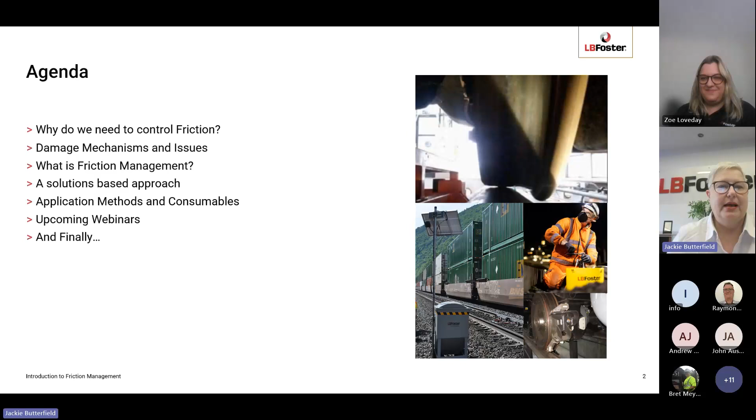So firstly, why do we need to control friction in the first place? Control is very much the correct term to use in this context. Friction is required for movement to occur - without friction there would be no movement. Acceleration and braking would not be possible without a certain level of friction. There's been much debate about what this absolute minimum level is, varying from 0.15 upwards. For the purposes of these webinars, we are basing that minimum level on 0.2.

In the wheel-rail interface, uncontrolled friction can lead to a number of damage mechanisms, shown in the pictures on the right. These include excessive wheel and rail wear, rolling contact fatigue damage, corrugation damage, curve squeal and flanging noise, high lateral forces, potential safety issues including wheel climb derailment and lateral force L/V derailment, higher fuel and energy consumption due to excessive resistive forces, and also at low adhesion levels, the incidence of wheel flats, signals passed at danger, and braking issues.

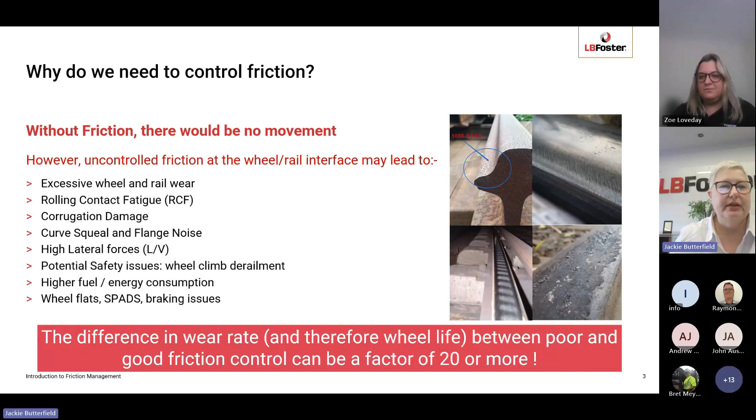It does this by the characteristics of the third body layer accommodating the velocity differences between the wheel and the rail, i.e. the creep and slip in the wheel-rail interface. This third body layer is made up of a number of materials which vary in proportion and composition at any one time - iron oxides, sand, other organic and inorganic particles, water, grease, oils, brake dust, and wear debris. The composition of this layer varies constantly from minute to minute and from meter to meter along the track. So wheel-rail friction depends entirely on the shear properties and composition of this third body layer.

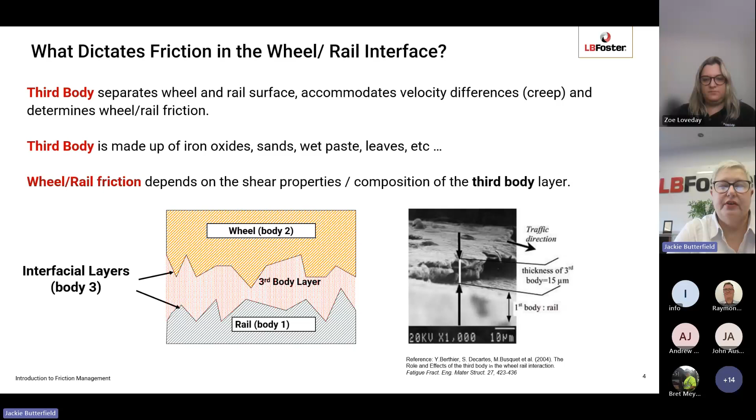Looking in more detail at this third body layer, each component brings its own characteristic level of friction. Working from the top, iron oxides under dry conditions - Fe2O3, the most common iron oxide - will characteristically give a coefficient of friction of between 0.6 and 0.7, a high coefficient of friction. However, if you add water and humidity into that equation, it will drop to below 0.2. So there's a fundamental difference depending on the environmental and climate conditions affecting the third body layer's properties. Other materials such as oil and grease will range anywhere between 0.05 to 0.2, heavy rain 0.2 to 0.3, and inorganic and organic contaminants will also have their own varying levels of friction.

Obviously, organic contaminants such as leaf layers will give a very low coefficient of friction, whereas sand, clay, ballast debris will give typically a higher coefficient of friction. So this mixing pot of the third body layer is changing all the time.

The best way to illustrate this is the classical bathtub model. You have a bathtub which represents the third body layer, and into that you have an intermittent on-off stream of traffic levels, environmental conditions, brake debris, wear particles, sand, friction modifier materials, which are mixed together in the bathtub under the influence of heat. Chemical reactions take place, and out of the drain holes come various chemical reaction products, solid particles, liquids. So this third body layer is changing all the time, and therefore the railhead coefficient of friction is also dynamic and changing all the time.

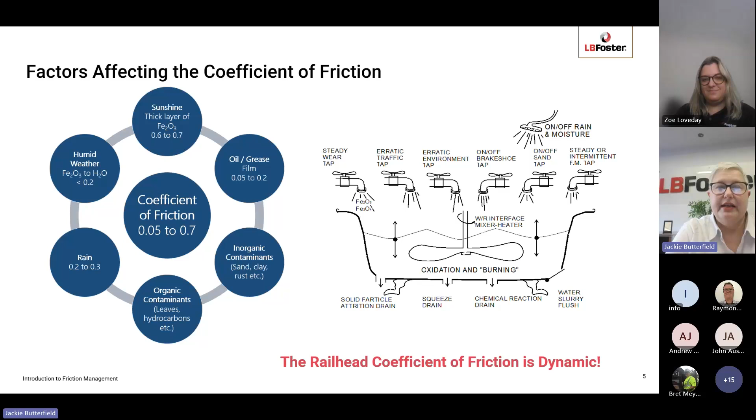In terms of the definition of friction management, our established and agreed definition is the deliberate introduction of materials into the third body layer between the wheel and rail to influence the frictional behaviour. So we're adding products in there to control that level of friction, to mitigate those damage mechanisms, and to give us the desired outcome that we want.

Looking at the range of friction levels that we typically get, with a dry rail condition, we're looking at upwards of 0.5, up as high as 0.7, 0.8, depending on the environmental conditions. For example, in the Middle East, friction levels can be as high as 0.8, even up to 0.9.

We have different target levels of friction that we want to achieve on the railhead and the wheel tread. On the rail head, we want to maintain an intermediate level of friction somewhere between 0.3 and 0.4, to ensure there is no impact on traction and braking. As I said earlier, the minimum level required for traction, adhesion and braking is around 0.2. So we want to achieve a level on top of the rail somewhere between 0.3 and 0.4 to ensure operational efficiency is not affected.

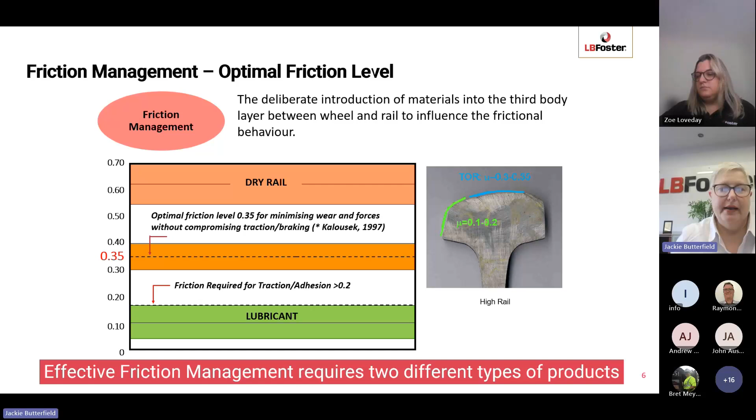We have our materials that we use for gauge face, wheel flange and back of flange lubrication. These are applied and will have the impact of reducing rail and wheel wear on the gauge face, the wheel flange, and any check rail or guardrail in place. They will mitigate against rolling contact fatigue development, particularly gauge corner cracking for the gauge face. They will also mitigate against flanging noise and wheel climb derailment risk, and help with fuel efficiency by reducing the resistive forces in curving.

Applying materials to the top of the rail or to the wheel tread will also have an impact, on top of rail and wheel tread wear. Again, rolling contact fatigue development, head checks, corrugation damage, top of rail squeal noise in curves, lateral forces. They will also have an indirect effect on flanging noise. As you're lowering the coefficient of friction, you're also lowering the lateral forces, so therefore you're improving the steering of the vehicle and reducing the amount of flanging contact.

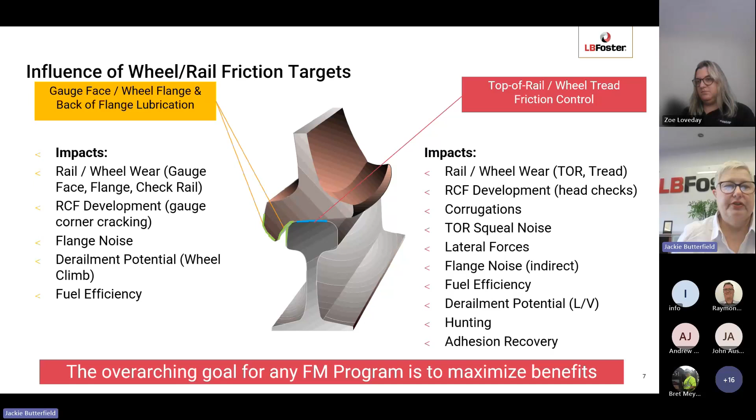So the overarching goal for any effective friction management is to maximize the benefits that you get from the friction management regime. We're looking very much at a solutions-based approach to friction management. To be truly effective, it needs to take into consideration the following: firstly, the technical details of the system.

So what are the issues that we're facing? Are these issues localized on a particular section of track, or are they widespread? How severe are they? How accessible is the track or the vehicles in terms of maintenance and installation? And how practical is a friction management solution?

Look into the system details, the age of the system, also the organizational characteristic. Who owns the system? Is it separate ownership of the track and the vehicles as it is in the UK, or is it under one ownership? Is it an open or a closed system? Is the track shared by other types of vehicles or one single type of vehicle?

What of those vehicles? What are their characteristics? What is their configuration? What is their wheel profile, their wheel rail dynamics? And also to look at the track - what is the track characteristics, the length, the number of curves, the severity of a curve, and also the environment.

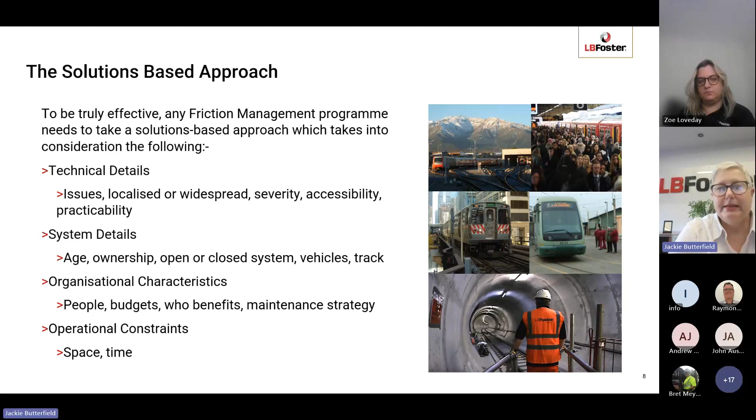Are there any operational constraints? Other constraints in terms of space for location of units, or are the constraints in terms of time? Is it a 24/7 operation? Does that give you limited time for maintenance and for installation of equipment? So all of these factors should be taken into consideration when designing a friction management solution.

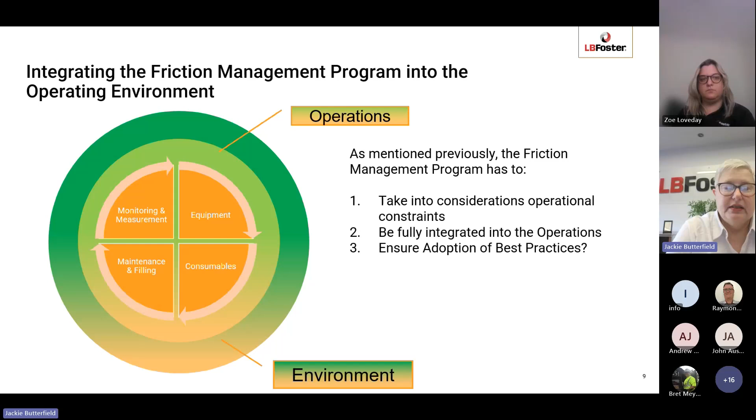And the friction management solution needs to be integrated completely into the rail operation environment. So it has to take into consideration any operational constraints, the operational regime, and also needs to adopt the best practices for friction management. But it's not just looking at the equipment that is used and the consumables. It also includes the maintenance regime and the filling frequency, and probably of most importance, a monitoring and measurement regime to enable you to actually measure the benefits that you're getting from the friction management program. Because if you can't measure and validate the benefit, then what is the point in employing the friction management in the first place?

So moving now on to the hardware. In terms of the two areas, we have a number of options for applying friction management products. So for the gauge face, we have a trackside option - trackside hardware that apply product to the rail. We have the option of onboard solid sticks, which apply product to the wheels. And we have onboard spray systems, which apply liquid products to the wheel flange. Also for the top of rail, we have trackside solutions as well, onboard solid sticks and onboard spray systems.

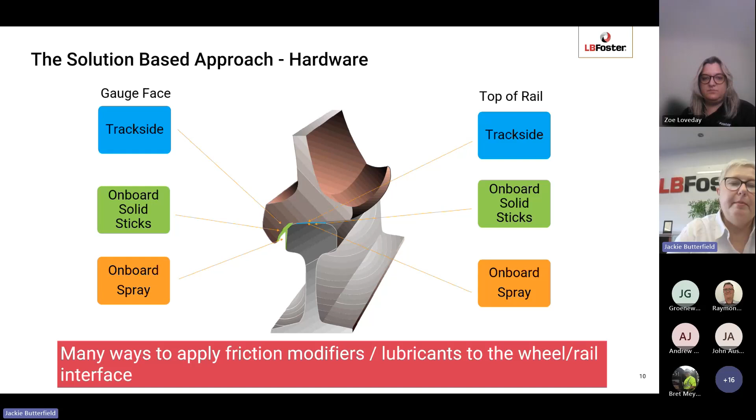So really we're looking at the right solution for the customer in terms of looking at localized issues as opposed to widespread issues, and that would drive you down either a trackside or an onboard solution. And then we're getting into the details of the consumables that you want to use in the system. Are they solid sticks or are they liquid products? So there are many, many ways to apply friction modifiers and lubricants into the wheel rail interface.

So looking now at those consumables, for trackside, for the gauge face or wheel flange, you're applying greases. For onboard solid sticks, you're applying flange lubricating sticks, or also the option is if you have a grooved rail or a check rail guardrail system, you can apply stick to the back of flange to combat back of flange wheel wear and noise as well.

And in terms of the onboard spray, you have a number of commercially available onboard oil spray systems, which will spray a fine spray of oil onto the wheel flange. At the top of rail and wheel tread, again, we have trackside options, which can apply friction modifiers or traction gels for adhesion enhancement to the top of the rail. For onboard solid sticks, we have tread sticks, which provide an intermediate coefficient of friction rather than a lubricating level of friction below 0.15. And then finally, we have the onboard spray systems, which can apply friction modifiers from the vehicle directly to the top of the rail.

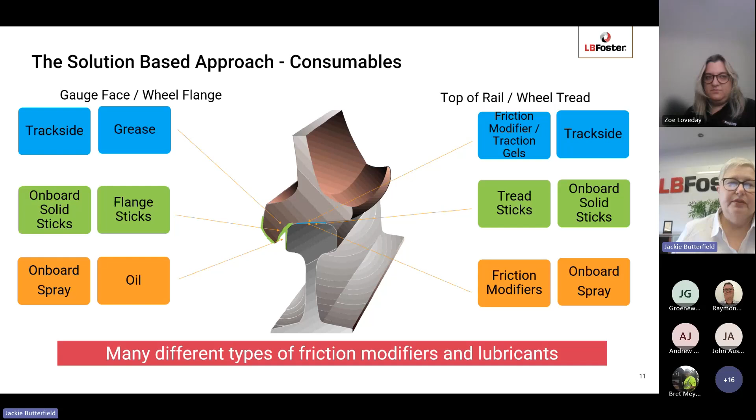So again, with the different types of hardware, we have many different types of friction modifiers and lubricants available on the market.

So now just going into a little bit more detail in terms of the hardware. So in terms of trackside friction management application, this is going back to the very, very simple systems. So these are the legacy systems, the mechanical lubricators. So these are only for gauge face lubrication.

So these are very simple mechanical devices which are actuated by a plunger, which is applied to the field side of the rail. The wheel presses the plunger, opens a valve, and then that allows the passage of grease from the spring-loaded yellow canister out onto the applicator bars and onto the rail.

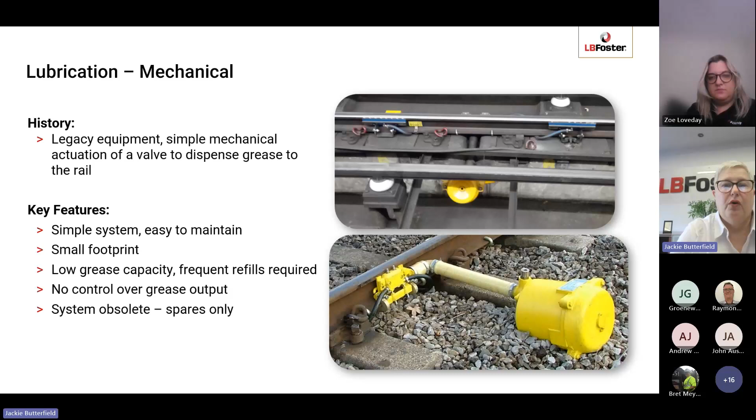So it's a simple system. It's fairly easy to maintain. However, it has a low grease capacity, and so you're looking at frequent refilling of these grease canisters. You also have no or little control over the grease output because every time the wheel passes, the valve is opened and the grease is applied, which may be over-applying the grease and you're wasting product that you don't actually need. However, as far as LB Foster are concerned, this system, the mechanical system, is obsolete, but we do still sell some minor spares for the existing units still out on the network.

In sophistication slightly, we have hydraulic actuated units. These are cost effective, again a very simple system actuated by a hydraulic actuator. A plunger is attached to the field side of the rail. The wheel actuates the plunger, which pressurizes a hydraulic line, which then opens the pump, and grease is applied through the hoses to the bars. Again, it's a simple system which outputs grease every time the plunger is actuated.

There is limited output adjustment, so you may be over applying grease or wasting product. There is a limited output adjustment by a regulator valve on the pump, which can be used to fine tune the output slightly, or you can increase or decrease the height of the plunger to give you a larger or shorter stroke, to give less or more grease.

These units are quite flexible in terms of capacity. They start from a small unit at 12.5 kilos up to a larger one at 37.5 kilos, but you can couple two tanks together to give a 25 or 75 kilo capacity tank. The other advantage is that you can actually embed them in the ballast, so you can bury them to give a very low height profile, fitting them into areas where you've got tight gauging tolerances.

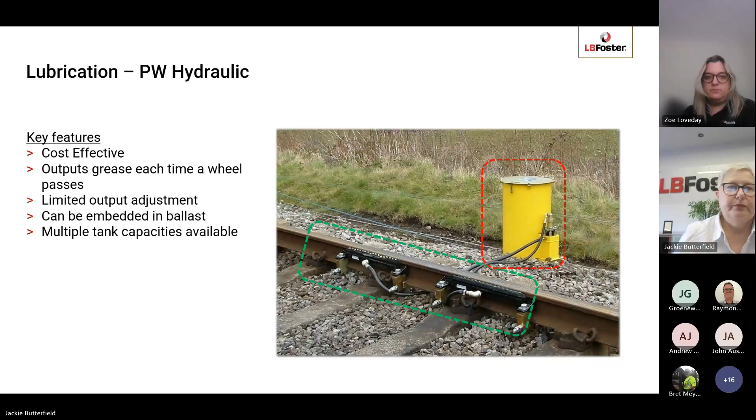So then we move on to the electric units, and we have a number of different types of units here on the screen. These give a much greater control over the output of grease. They feature a product tank and a digital control box, which allows you to set a precise pump time and axle count for each activation and application of grease.

Typically they are solar panel powered with a 12-volt battery, but they can be AC mains powered as well. These are seen as the best approach and the most sophisticated solution for gauge face lubrication, and also for top rail friction modifier trackside. So one electrical lubricator can replace multiple mechanical or hydraulic lubricators due to the increase in efficiency.

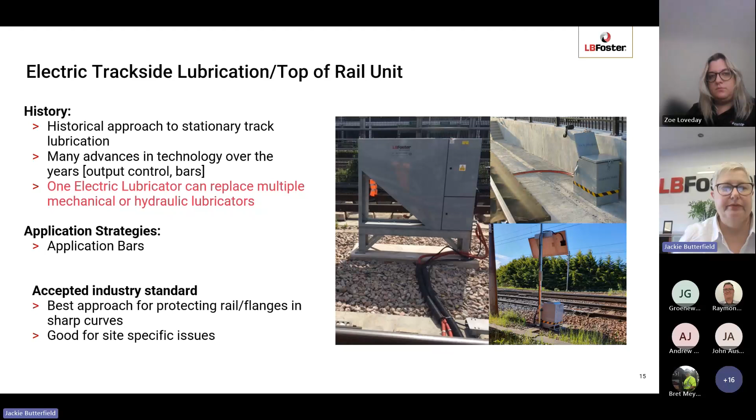To get the grease onto the rail, or the top rail friction modifier onto the rail itself, we have a number of designs of applicator bars. These are clamped to either the gauge face of the rail for gauge face grease, or to the field side for top rail friction modifiers, or to the check rail. The top right picture is a check rail bar applicator. These have multiple distribution ports to distribute the grease effectively.

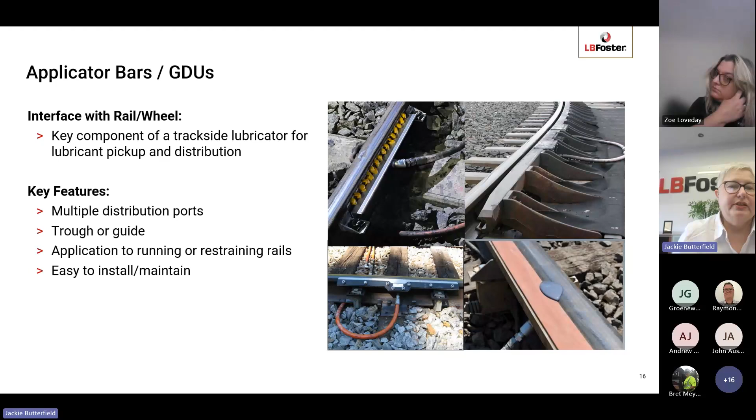They can come with a grease trough or also with a grease guide, which will assist in keeping the grease against the gauge face. They can be applied, as I said, to running or restraining rails, and they're easy to install and maintain.

And then we have the traction gel applicators, which are a slightly different design but work in exactly the same way, with a product tank, a control box and a pump system, and apply traction gel onto the top of the rail.

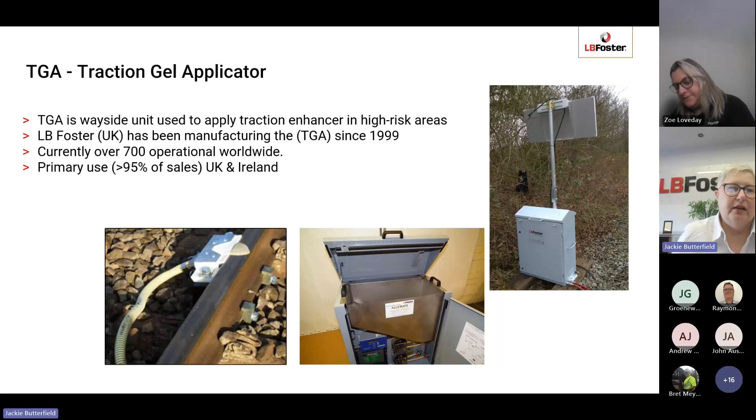Onboard solutions, we have the solid stick solutions. Here we have an example of a triple system: a wheel flange stick applicator, a tread applicator, and a back of flange applicator as well. These are a very simple mechanical system with a constant force spring in the back of the applicator, which holds the sticks against the wheel. No electrical or pneumatic connections are required. The system is self-regulating and is very, very easy to install and maintain.

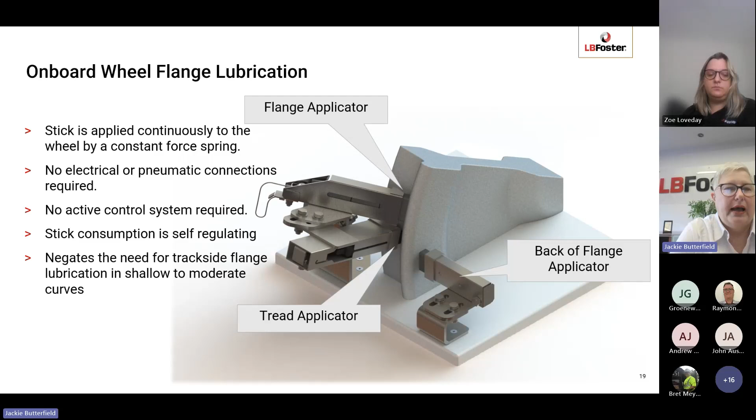The key components of the system are an interface bracket, which connects the applicator to the bogie frame of the vehicle, and the applicator which houses the sticks.

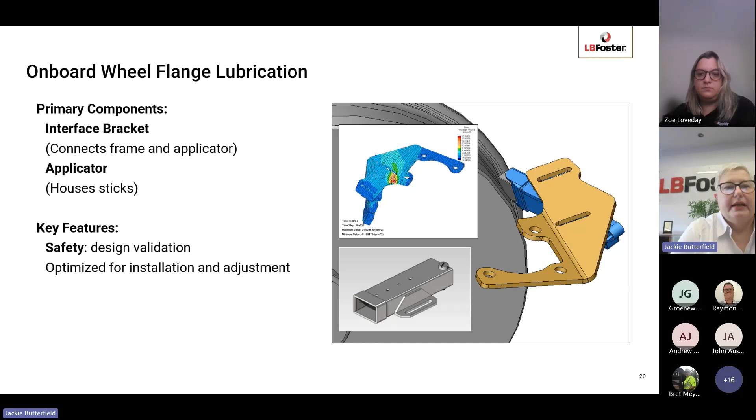And then we have our onboard top rail and wheel flange spray systems. Wheel flange oil spray systems are well established. L.B. Foster doesn't supply these, but there are a number out there on the market. But top rail spray systems are a newer technology and give the same benefits as top rail trackside units. However, the maintenance is carried out in the depot.

So in terms of safety, these are much safer systems, and they can be controlled to spray where and whenever they are required through a sophisticated control system.

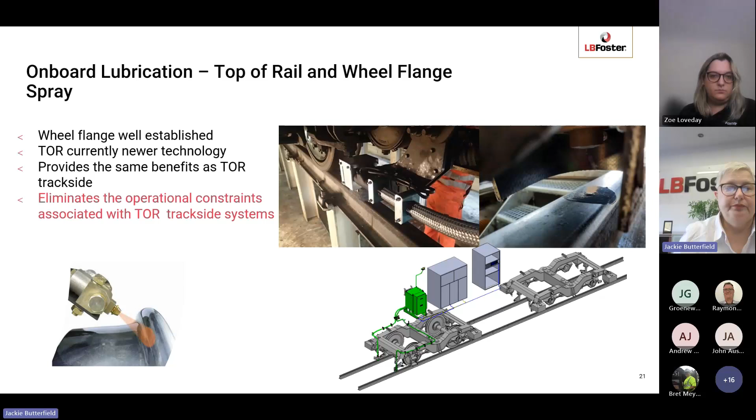The benefits that can be achieved - a couple of tables here on rail wear and wheel wear reduction. We have typical reductions in top of rail wear and gauge face wear for gauge face systems and a combination of gauge face and top of rail friction modifiers. So you can see the range of benefits there, and also on the wheel wear - up to 95% reduction in flange wear and around 50 to 60% in tread wear.

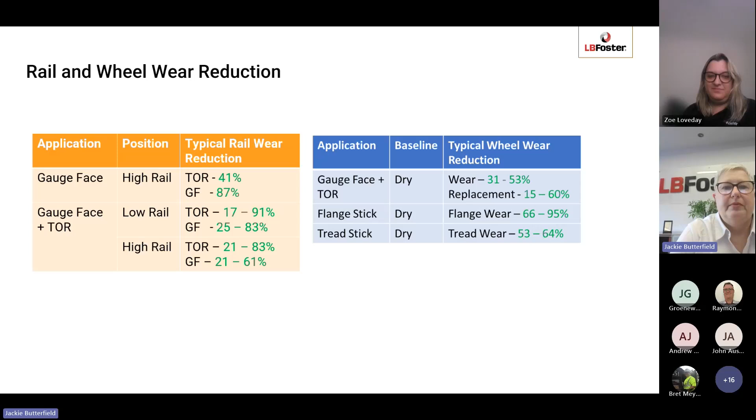So finally, in summary, I've gone through why do we need to control friction in the first place, what are the damage mechanisms and issues, what is the rough definition of friction management, and how do we approach it from a solutions-based approach. A brief walk through the application methods and consumables.

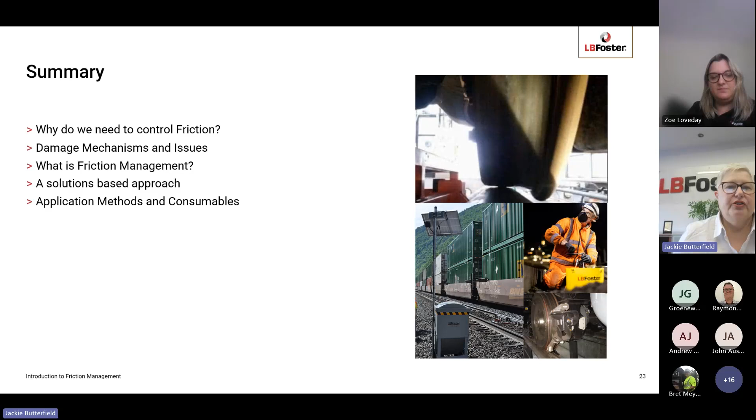So what's coming next? As I said, this is the first in a series of webinars, so we've got the next few webinars which are going to take a deeper dive into some of these topics.

Our next webinar is on Wednesday the 2nd of October, on wear and rolling contact fatigue. We'll follow up in November with noise, December with corrugation damage, January with low adhesion issues, February with energy consumption, March with derailment issues, and finally in April, a look at validation and trials best practice - how do you measure and validate your friction management program to get the best out of it?